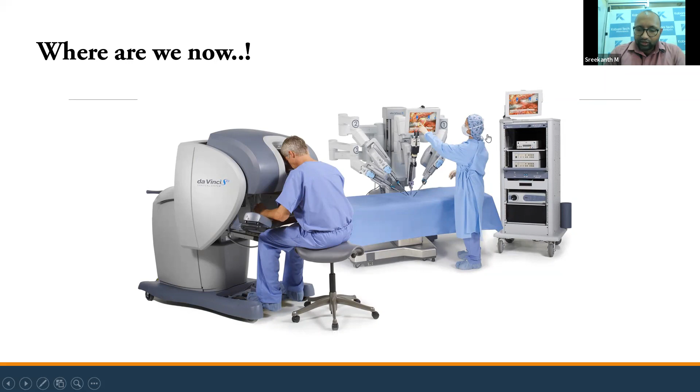So here too machine learning is present, but there are important things to know, because the minute movements of end effectors and other actuations require doctors to change the positions of the arm. Here it's not minute, but changes are still required because the velocity or acceleration is much larger compared to the patient doctor's hand movement. So the scenarios are different, difficulties are different, but there are common background things which we need to understand while designing these kinds of systems.

So after these 4 or 5 slides, I have put together a numbered itinerary of what kind of things we need to understand or check before designing a robot. It may not be apt, but it will give you an understanding of what to do. So the initial one was a surgical robot, the second one is a car, and the third attempt is to get a companion for us.

What it basically does is act as a companion. We need someone to talk, someone to listen. So these kinds of terrible conditions of human nature, human conditions, can be resolved with a robot, something like this. So where do we stand now?

Okay, so this is a small robot. You can see that it's a size of only 20 millimeters. What it does is basically jump. What is new in it? It's basically a flea. I was working on the same material for around 6 years.

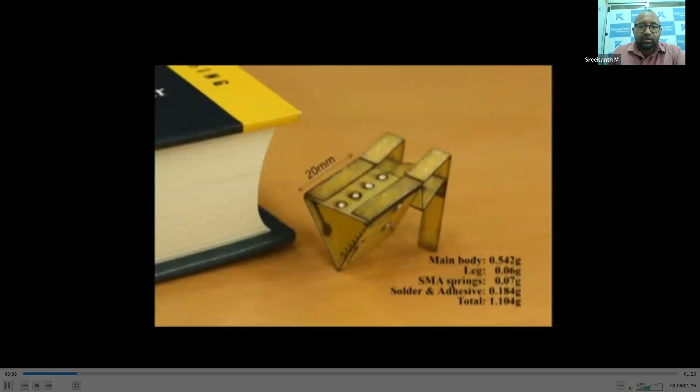It's called a shape memory alloy. This device or structure is kind of inspired from origami. You can know that these origami structures are basically made a long way back. They are having a large, even in the James Webb Telescope, which NASA sent to outer space, the antennas and reflectors were all

folded with the help of these kinds of origami structures. So similarly, we can have a revisit to every element for getting new design approaches. So this is basically something like that. The thing which is like a spring is basically a material called shape memory alloy. You can see what it is doing.

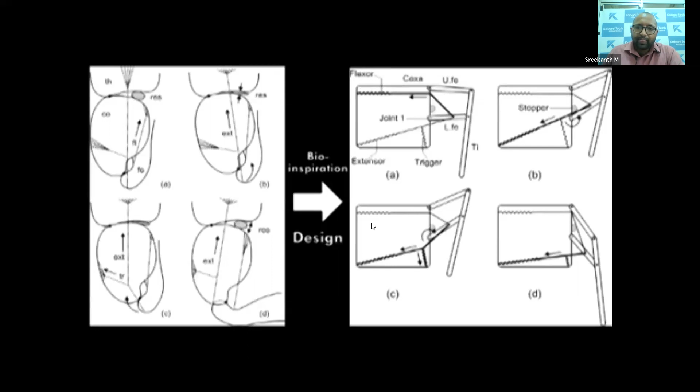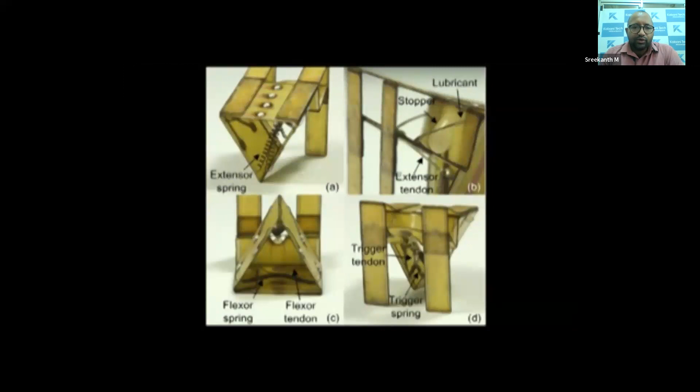It is made with some kind of new material, it's a composite material. The PCB is itself on it. You can say it is a kind of flexible PCB, but it's not flexible that much, right?

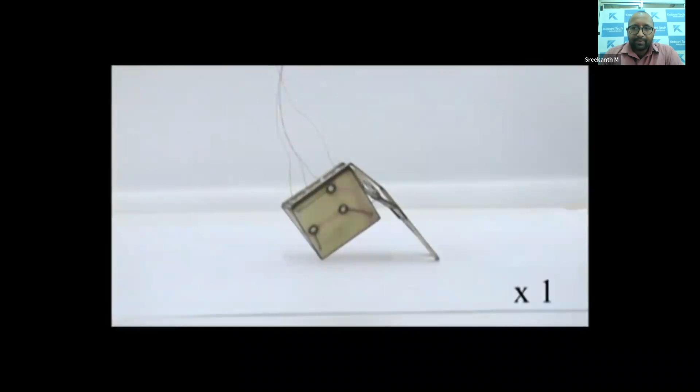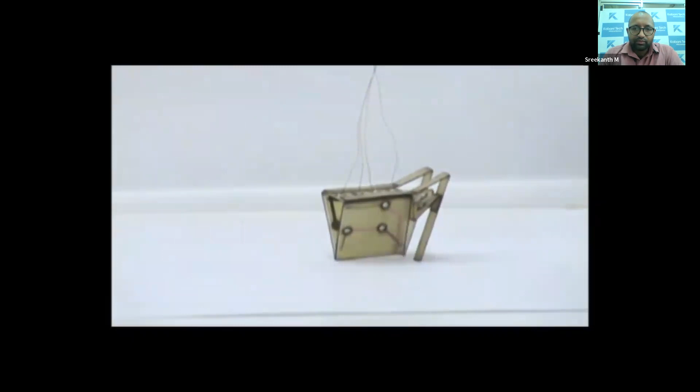So tension is going on. Now it will jump. See, now the slow motion will come with a 3000 frame per second. See, it jumped.

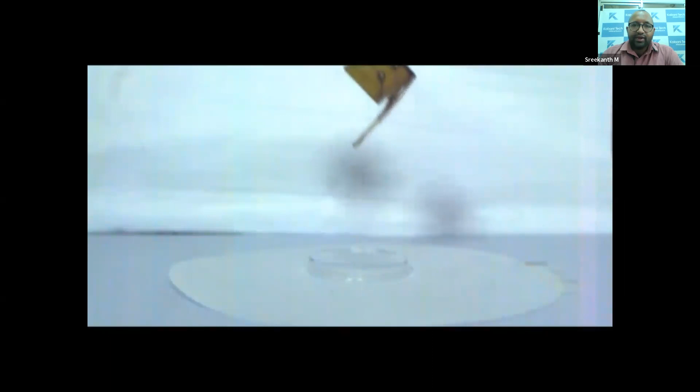So there is no conventional actuators like motors, pneumatics, hydraulics, nothing. The entire actuator is a material composition called nickel titanium copper, or nickel titanium, commercially named shape memory alloys. See how much higher it's basically jumping. The weight of this device is only 2 gram or 3 gram.

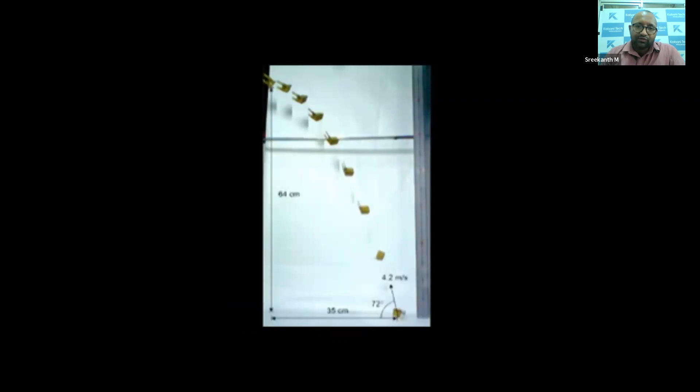So if you blew it, it will go a large distance, right? Only that much weight, 2 gram or 3 gram. So with conventional actuators, we can't design such kind of a device. Can we get an actuator at 2 gram or 3 gram? No, never. So that's why people are working in material science field to get new information.

So I will turn my screen, and you can see that there is a periodic table in my office itself, because we need to have a revisit on every material possible every day, since we don't know what kind of surprise is waiting for us. We don't have that kind of facility, but there is no limit to thinking or dreaming. That's why we have a look at the periodic table every day.

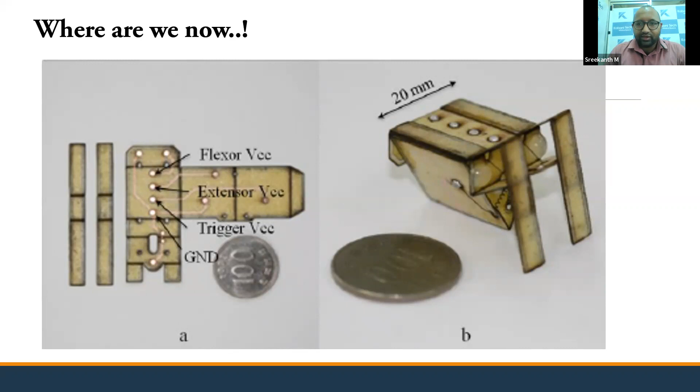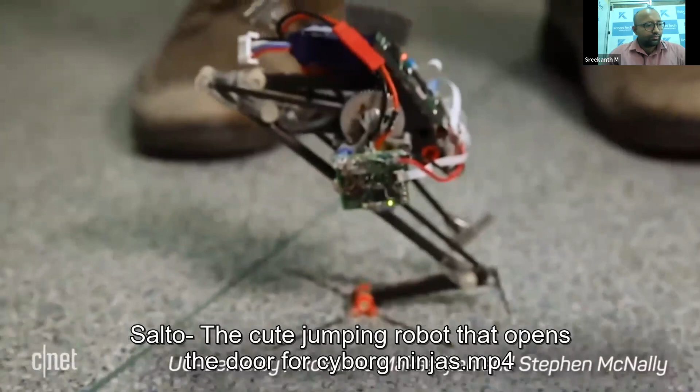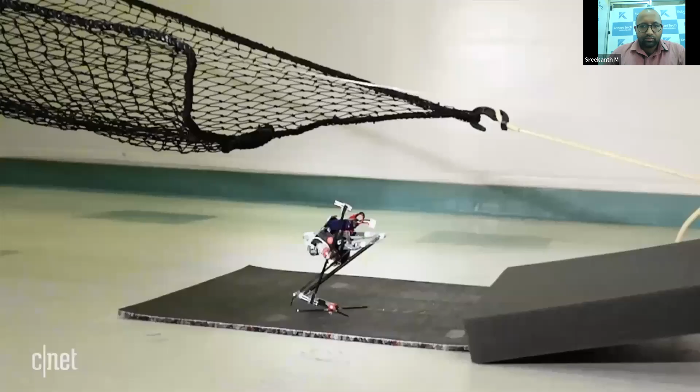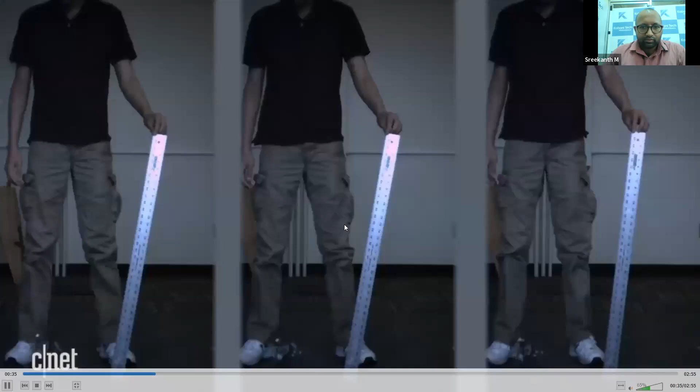They somehow stored that momentum and made it push further from the ground. So that's a new design, something like that. Similar designs have been there for a long time, but I thought you should have a look on that. So that's why I put it.

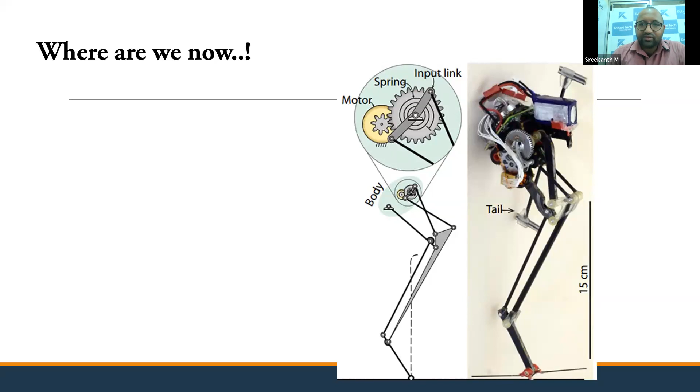So the conventional actuators, sensors, motors or pulleys have been used, nothing new, but they arrange them in a different manner, right? So that's important. How can we think of something like this? We need to always have a better idea of how toys basically work. Then only we can develop new things, right?

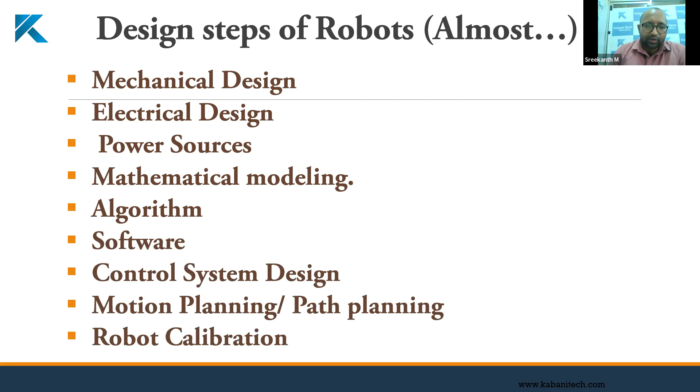So what are the design steps of robots? How do we design a robot? That's a question we need to ask. But I know not every part, I know only a small part, that's why I put it almost in brackets. Yes, mechanical design is there, electrical design, power, mathematical modeling, algorithm, software, control system design, motion planning, path planning, and robot calibration. All these things are basically required as a backbone for designing any kind of robot.

So the mechanical design basically includes not only the structure, but also the material perspective of selection of those kind of structures. What kind of materials, what kind of composites we design, what kind of composites we take, even what kind of nuts and bolts we take while designing this kind of robots.

Because the problem with mechanical design is that, take a look, if I am making a robotic arm, something like this, right? Robotic arm, there is one joint and a second joint, or a three degree of freedom robotic arm. The problem is, when we design each and every joint or these links, how do we combine these links to other links? See, it requires fasteners, right? Nuts and bolts, something like that.

So what happens when it is moving from one point to another? Is it smooth like this, somewhat what we are moving? No, it requires an initial acceleration, a steady state movement, and a final deceleration. When these acceleration, steady state movement and deceleration occur, it basically generates a lot of vibrations back to each and every joint, so each and every joint basically vibrates.

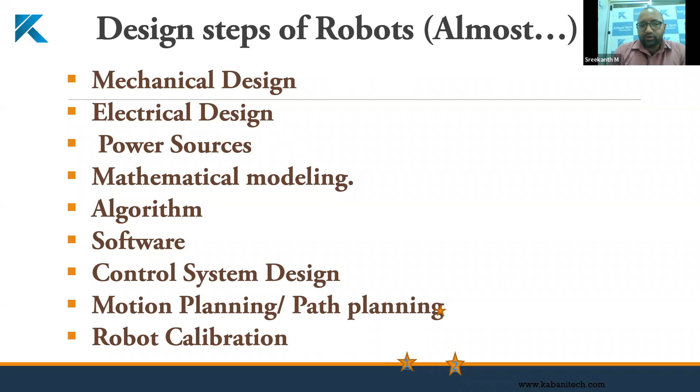So, mathematical modeling. I'm always telling you about this kind of mathematical modeling. What is this? You are basically doing these kinds of things in independent engineering streams for at least 2 or 3 years, or maybe from your 8th standard itself.

If you are taking an electronic circuit, you need to have a mathematical model for that. So what we basically do is have an RLC circuit, and we need to have a transfer function for that. The transfer function tells you what the system is capable of, at what basic fundamental frequencies it will work, or whether it will be unstable. This is what it is.

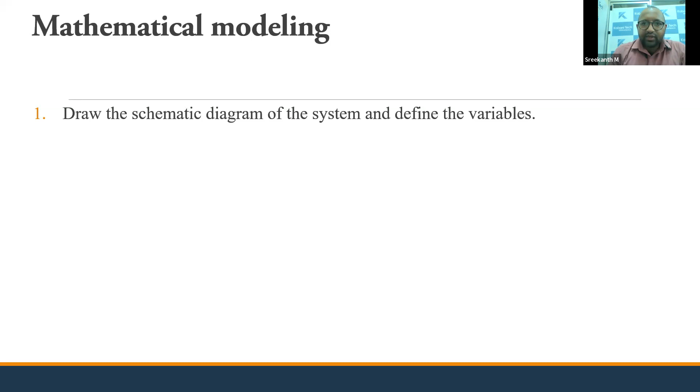So for that you basically draw the schematic diagram of the system and define variables. Second, using physical laws, write equations for each component, combine them according to the system diagram, and obtain a mathematical model. Like KCL or KVL - KVL was voltage law, KCL was current law.

Then, to verify the validity of the model and its predicted performance, the results obtained by solving those equations of the model are compared with experimental results. The problem with a mathematical model is that once you get one, you should not think that it's a final thing. There may be issues with the selection of variables and values which you thought.

So in order to verify the mathematical model, you need to make a physical model itself. So the question of the validity of any mathematical model can be answered only by experiment.

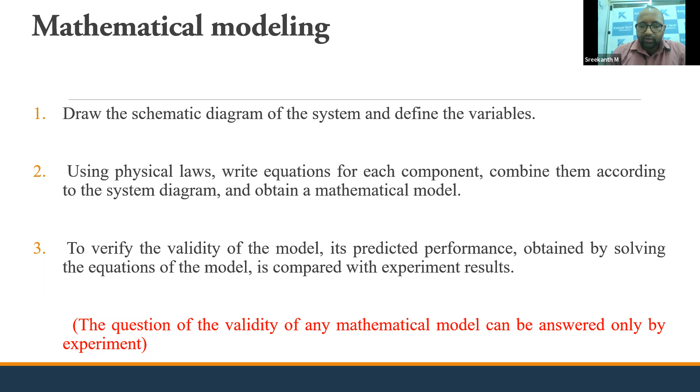So we are seeing some kind of failures, where this kind of mathematical models may fail during the initial approach. This is not my words - this is the words by Ogata.

There is a book called System Dynamics by Ogata. You may have learned control systems by Ogata, but the problem with that book is that it basically has a preceding book called System Dynamics. Go to your library and start checking for System Dynamics. You can enjoy a better perspective of control systems by starting with System Dynamics.

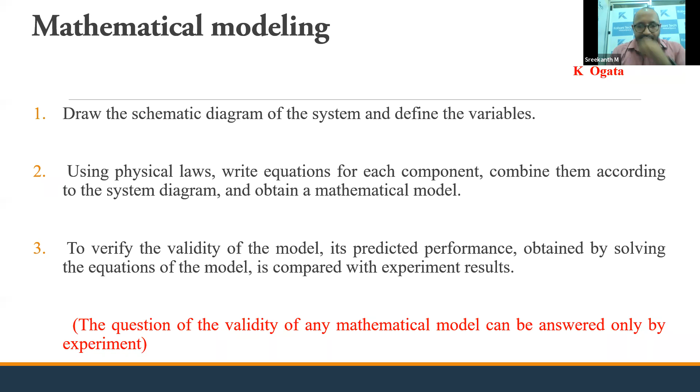And applications of robots - I'm going to the final slides on that. Applications of robots and machine loading, the simple ones or the still required ones: pick and place operations, welding, painting, inspection, medical, military, home automation, leisure, and many more.

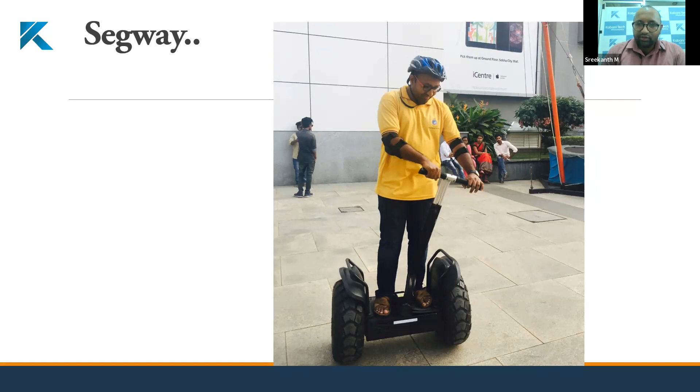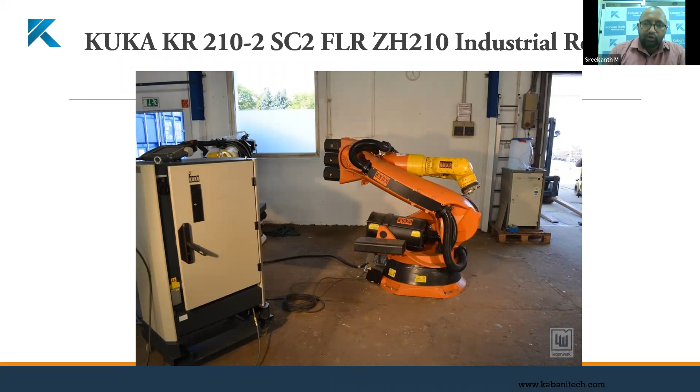So what are the characteristics? Payload, reach, precision, repeatability, DOF. Actually all these things come under the nuts and bolts required when designing a robot. There are thousands of different stringent approaches we need to take care of, but in 1 hour it's impossible to talk about all of that, and I don't know everything.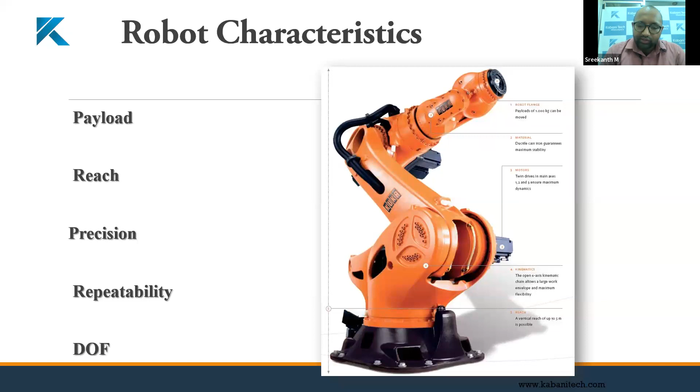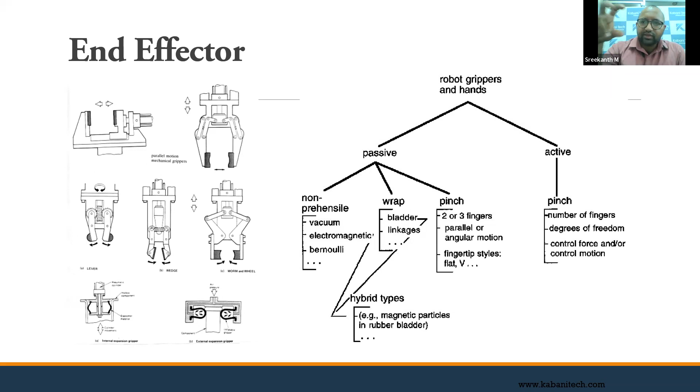You need to have a better understanding of end effectors. Sometimes you need to hold an egg, but sometimes you need to hold a huge steel bar, sometimes a very fragile object. So these end effectors, at the end of any robotic arm, have to change. How to select all these things is an entirely different area of expertise - you can have a PhD only on that.

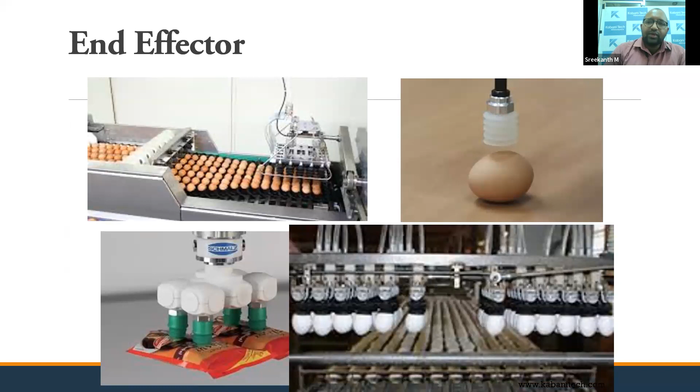New research directions include the material perspective, material design in every manner, actuators, material structures, everything. You don't need to worry about whether you are in electronics or computer science, you can still have your own hands in these new researches, because interdisciplinary research and development is now allowed at any university, since they have understood what is required for faster growth in our future.

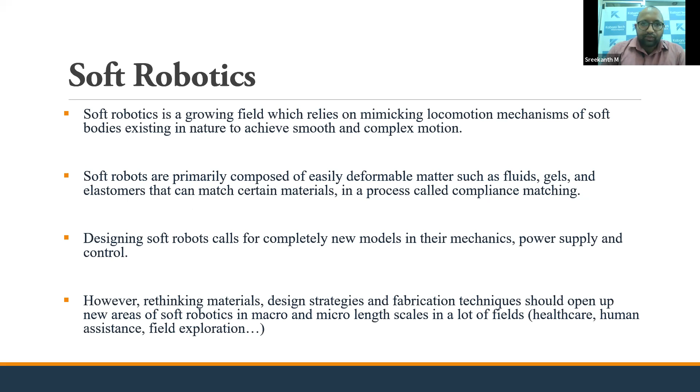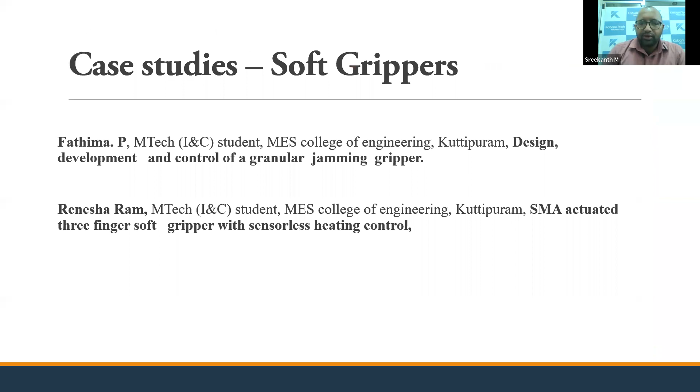I'm just giving a case study. This is a small granular gripper, designed by one of my students earlier, 2 or 3 years back.

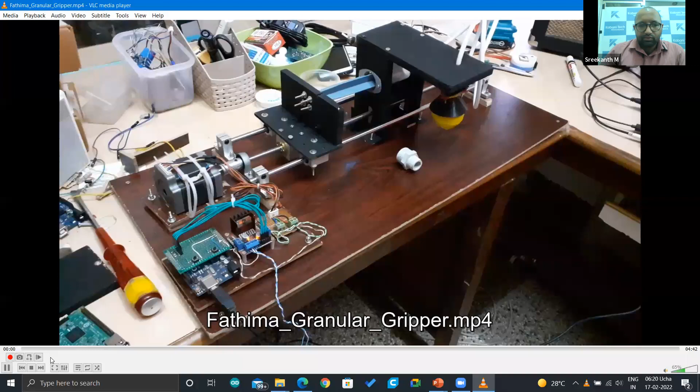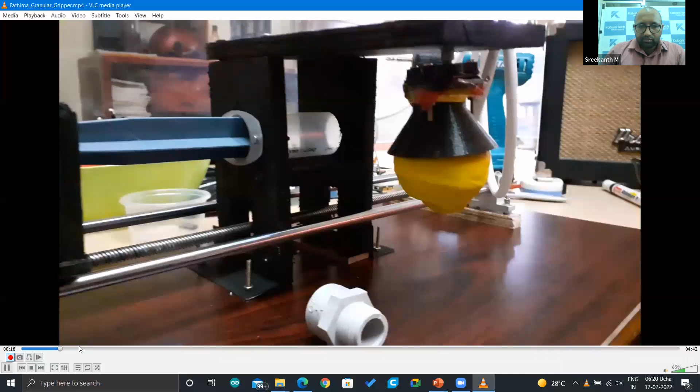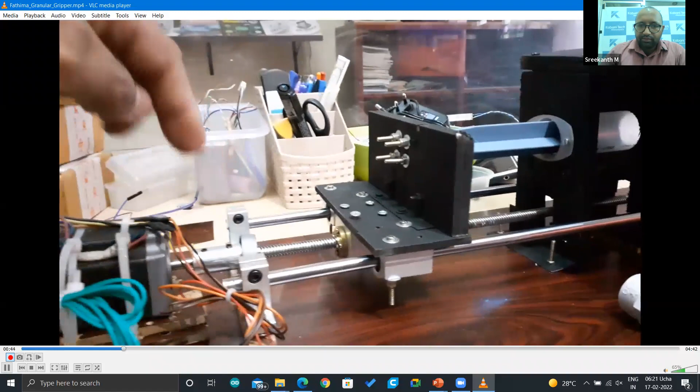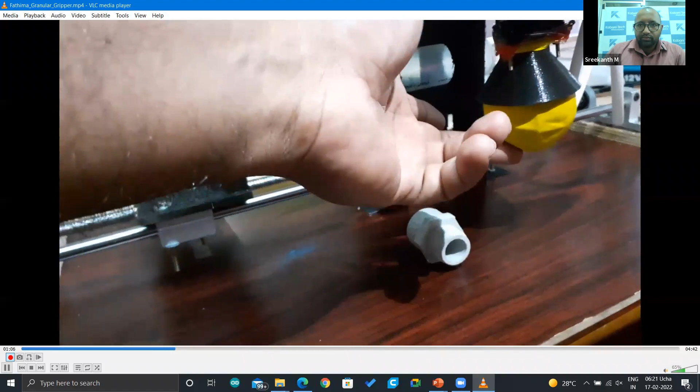You can see there is a bubble in which small grains are filled. When it is inflated, it makes a bubble. When it is deflated or decompressed, it basically holds anything in the middle. It's made like a plunger kind of thing, and it holds at this position. I believe I can show it another time.

How do we make all these things? We first modeled them, then made a 3D model, and by using a 3D printer, we made these devices.

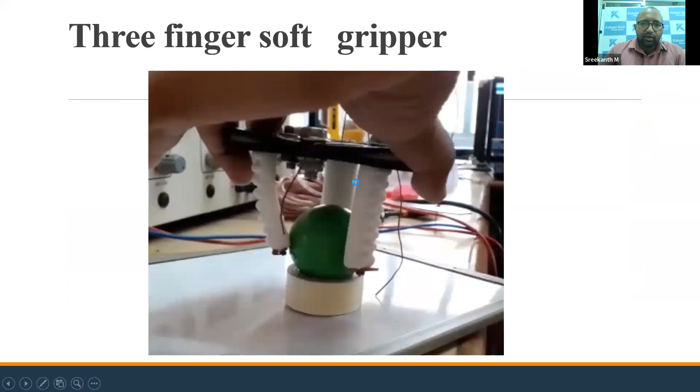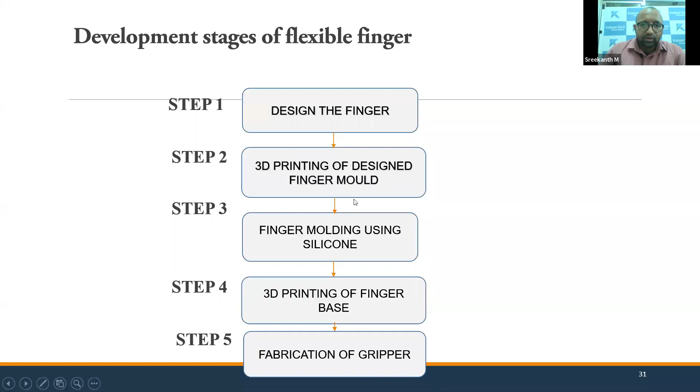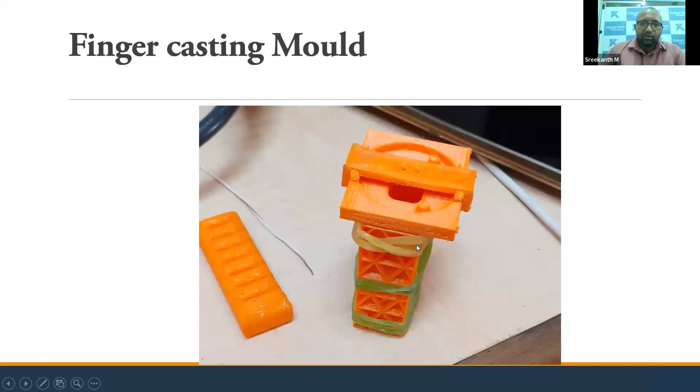Similarly, there is a soft gripper. It can hold things. How do we make those fingers? It's basically a silicone mold which we made first, this is the finger design and we made a mold for it. We pour silicone in from these points, and this is silicone, and we made these silicone fingers. These things are possible even at the B.Tech level, there's no issue.

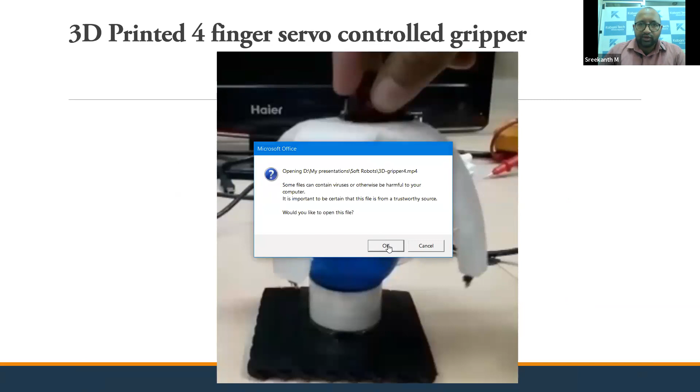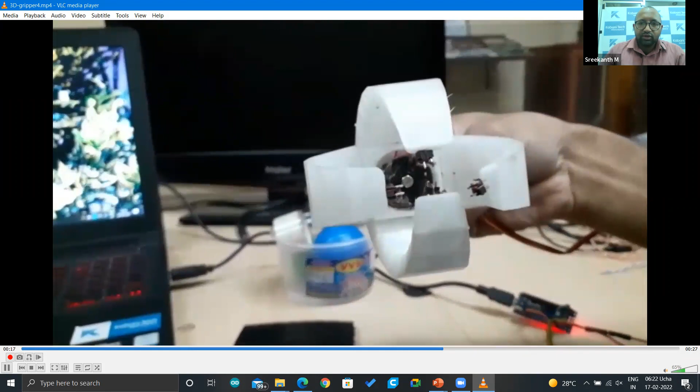Another kind of 4-finger mechanism is there, this is also made by us. These are basically kind of hobby products. Our actual client products can't be shown in this video because I have some NDA with the clients. But we can make different kinds of grippers even at our premises, no issues. These are basically 3D printed.

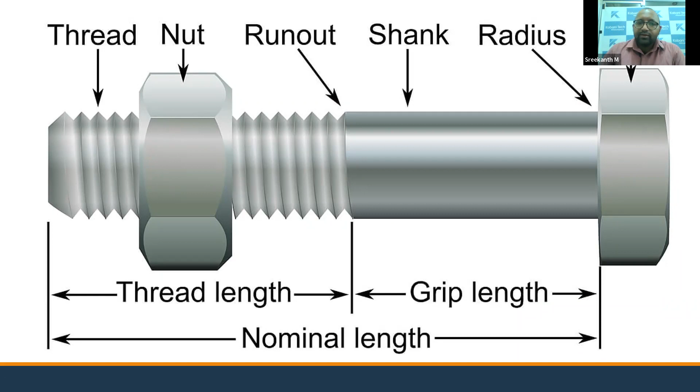So I'm basically winding up my session. When we think about everything in detail, you need to understand it. There are so many different things to be learned, even from a single thing like nuts and bolts. There are so many kinds of nuts, so many kinds of screws, and so many kinds of bolts. You need to understand where to fix or where to put all those things, and understand your applications better.

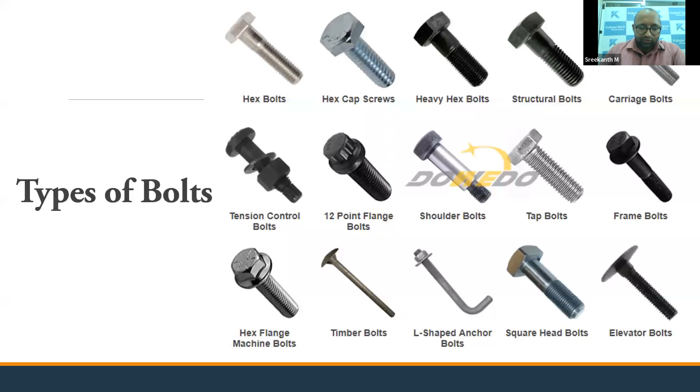Thank you. If you have any questions, you can ask me.

I think someone is... okay. It's not easy to start this kind of robotic project at the beginning, but yeah, I think someone is trying to have a chat. Audience, if you have any queries, you can put it in the chat box or directly unmute and ask.

Sreekanth sir, is anyone asking questions? If a student is a real beginner, where from can he or she start learning robotics? If there are no questions, I have a general wind-up question for this session. Hello, sir, yeah, hello. Yes sir. I have one general question: if a student is a real beginner and doesn't know anything, where does he or she have to start to learn about robotics?